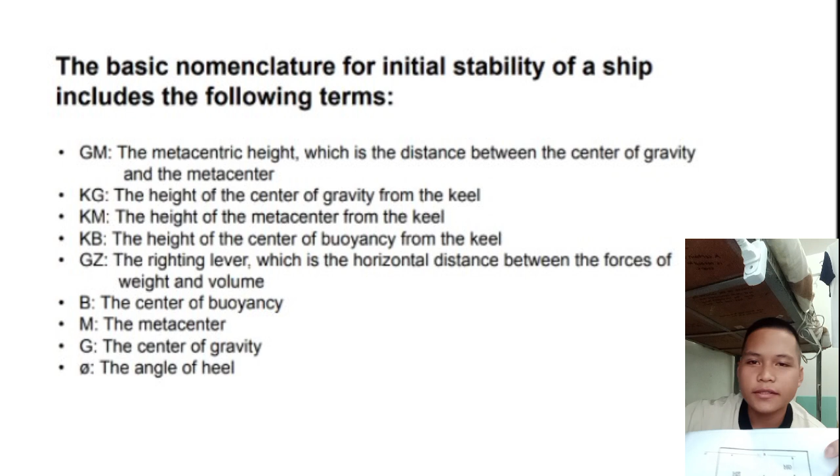The basic nomenclature for initial stability of a ship. GM: the metacentric height, which is the distance between the center of gravity and the metacenter. Positive GM: the ship is stable and will return to an upright position after tilting. Zero GM: the ship is neutrally stable and may remain at the angle it was tilted to.

Negative GM: the ship is unstable and will capsize if tilted. KG: the height of the center of gravity from the keel.

Significance: KG is determined by the distribution of weight on the ship, for example, cargo, fuel, and equipment. A lower KG, closer to the keel, improves stability, while a higher KG reduces stability and can lead to capsizing.

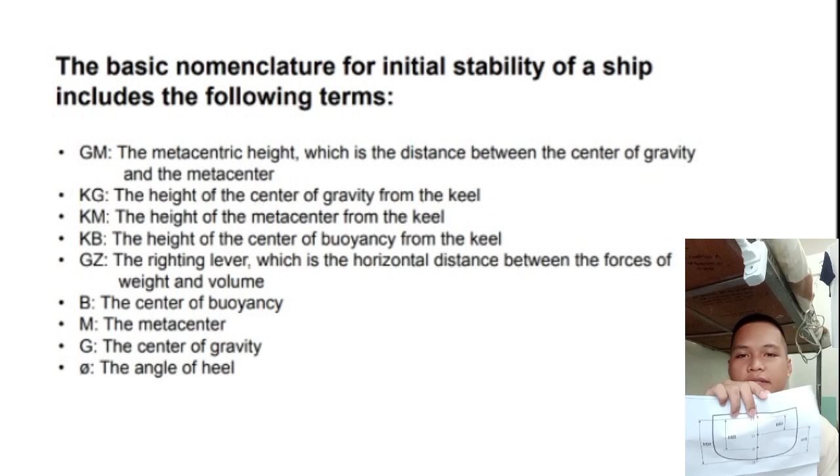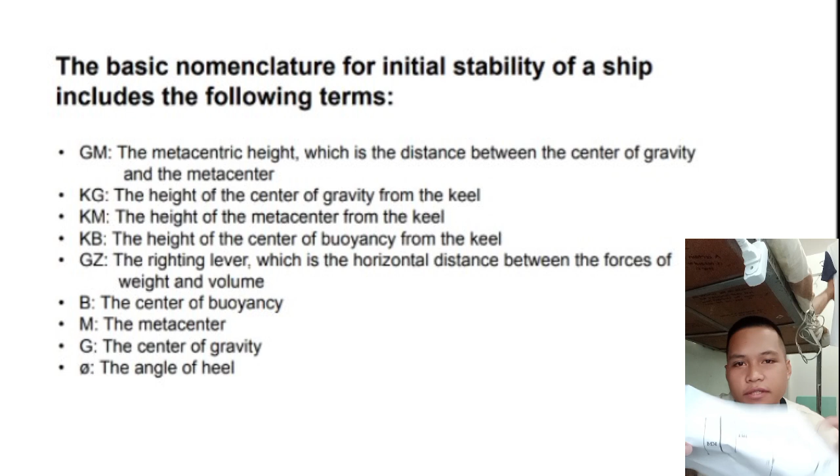KM: the height of the metacenter from the keel, or the vertical distance from the keel to the metacenter, which is the point where the buoyant force acts when the ship tilts slightly. KB: the height of the center of buoyancy from the keel, which is the point where the upward force acts.

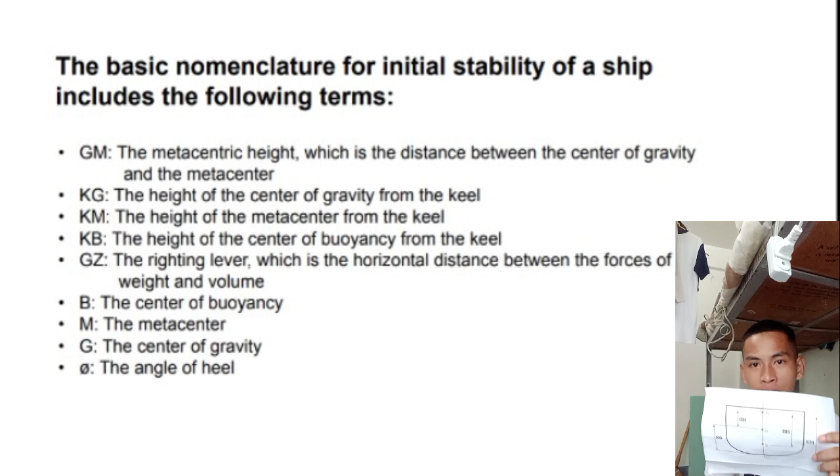BM: the vertical distance between the center of buoyancy and the metacenter. Significance of BM: BM is influenced by the hull shape and size. A large BM contributes to good stability, but if BM is too large, it can cause excessive rolling, leading to discomfort or cargo damage.

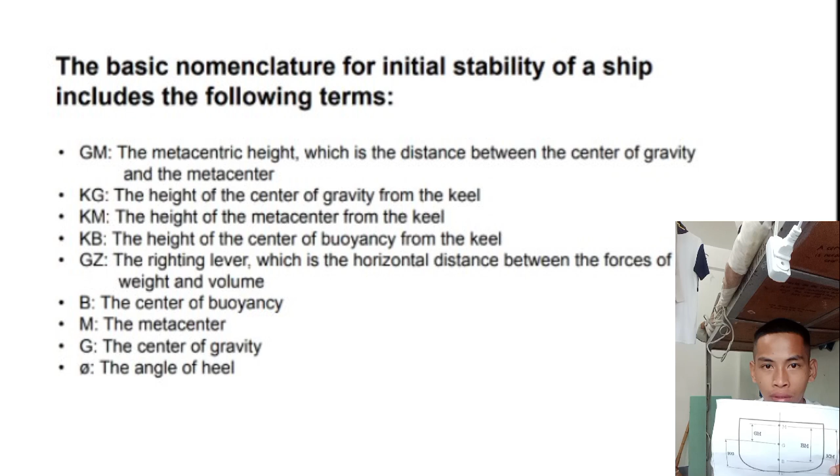GZ: the righting lever, which is the horizontal distance between the forces of weight and buoyancy. B: the center of buoyancy. M: the metacenter. And G: the center of gravity.

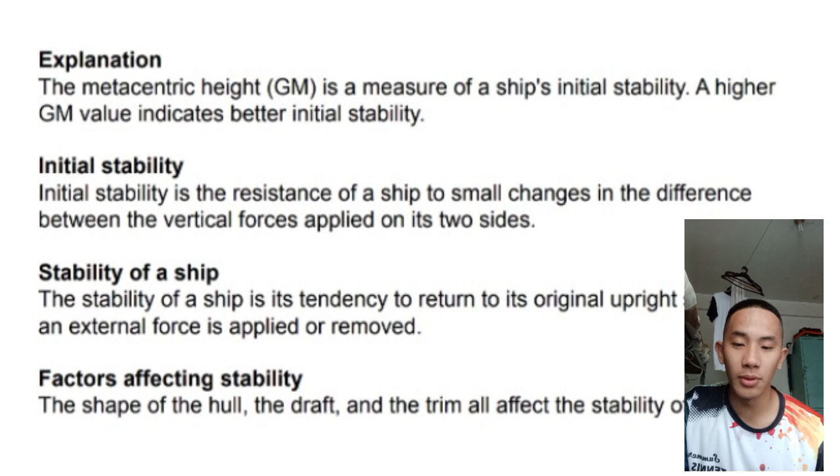The metacentric height is a measurement of a ship's initial stability. A higher GM value indicates better initial stability. Initial stability is the resistance of a ship to small changes in the difference between the vertical forces applied on its two sides.